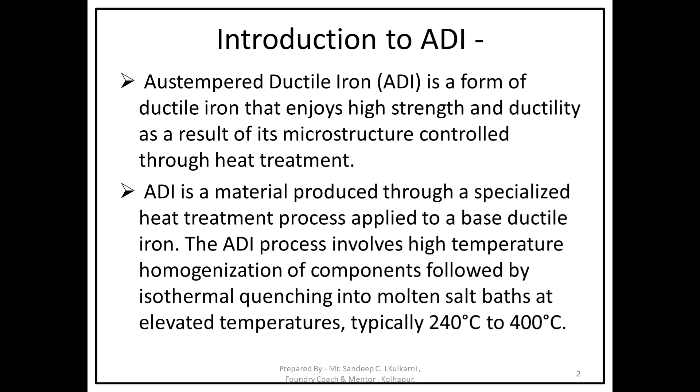Austempered ductile iron is a form of ductile iron that enjoys high strength and ductility as a result of its microstructure controlled heat treatment. Austempering is a specialized heat treatment process used to fortify metals, and it amplifies several of the desirable properties ductile iron castings already possess, including strength, abrasion resistance and toughness.

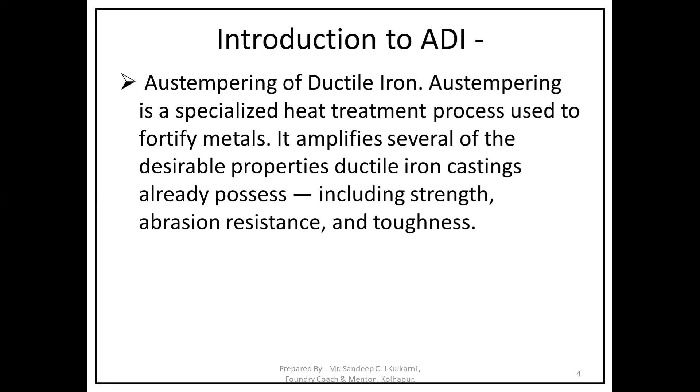Carrying out on the ductile iron, basic ductile iron metallurgy. Austempered ductile iron is a strong, light, and wear-resistant material. So, basically, what is the difference between a ductile iron and austempered ductile iron?

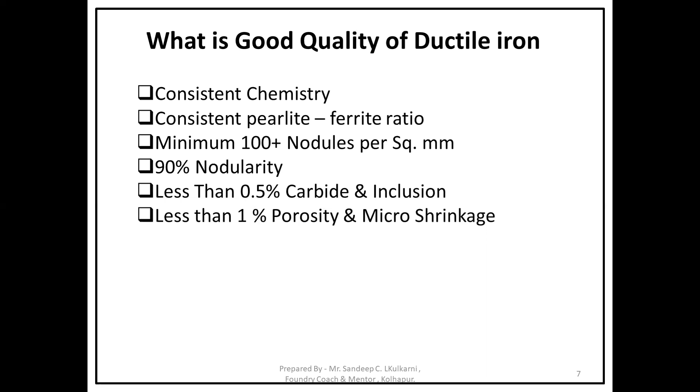There should not be porosity or micro shrinkages. The soundness of the casting should be good. That is also another requirement for making good quality austempered ductile iron. So you have to get good quality ductile iron first to get good quality austempered ductile iron. So this is the base chemistry that is tentatively expected. I have given it here.

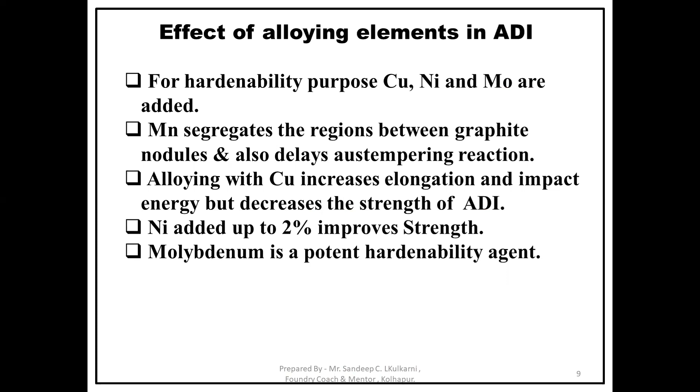Nickel is added up to 2% to improve the strength of the metal. Then moly is added as a potent hardenability agent as well. So these are the effects of alloying elements in ADI. Then we have some important grades which have been derived.

It's 850/10. That is, tensile is 800, elongation is 10%, and typical hardness should be 269 to 321 BHN. Then 1050/7: 1050 is the tensile strength, 7% is the elongation, and 302 to 363 is the typical hardness. 1200/4 is another grade: 1200 is the tensile, 4% is the elongation, 341 to 444 BHN is your hardness.

Then 1400/1: 1400 is the strength where 1% elongation is required, and 366 to 477 BHN is the hardness range. And another grade is 1600, typically showing a hardness of 444 to 555 BHN. So these are the typical popular grades in

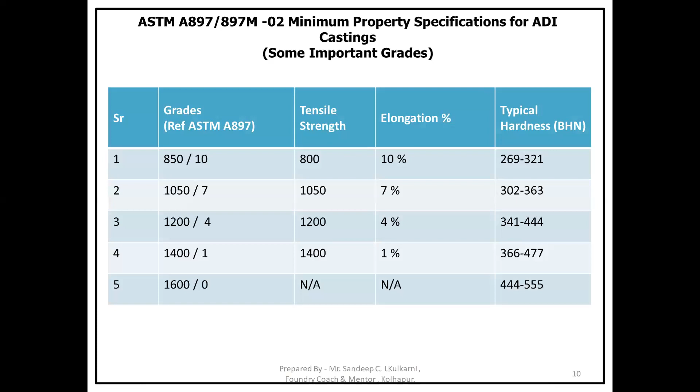austempered ductile iron. If you are going for 10% elongation, then you know that 400 or 450 should be the tensile strength. But here 10% elongation you are getting with 850 tensile strength. So your elongation remains the same while your tensile strength increases. So this is a very important factor: you are getting both tensile strength as well as elongation on the higher side in this austempered ductile iron because of the heat treatment we are carrying out on the ductile iron. So this is very important.

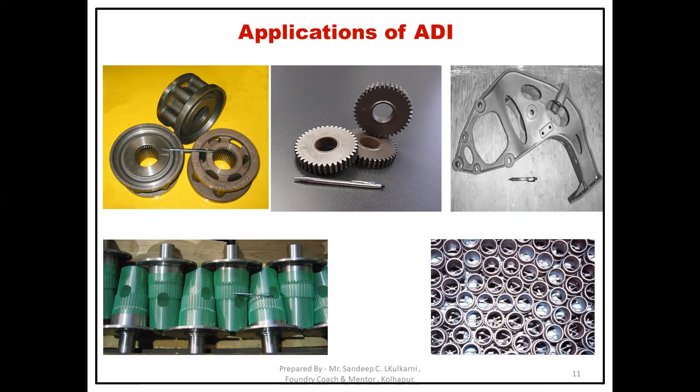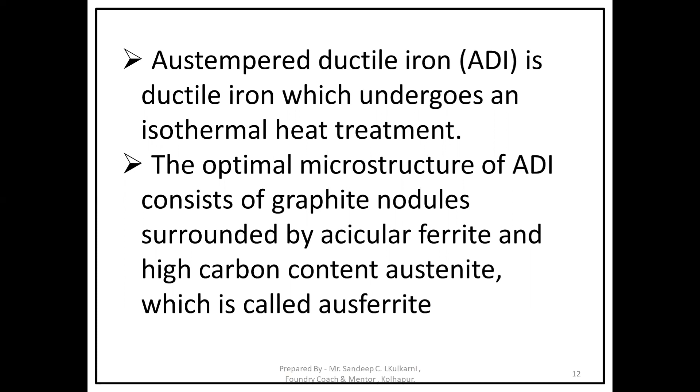So this is very basic information about ADI. I hope you understand it. It requires a good quality ductile iron with copper, nickel, and moly, and then you have to go for proper heat treatment. The heat treatment cycle, as I told you, is not very much defined by the suppliers or heat treatment vendors in the market. So it is a little bit of a suspense kind of thing, but there are people who can do this ADI heat treatment cycle as well.

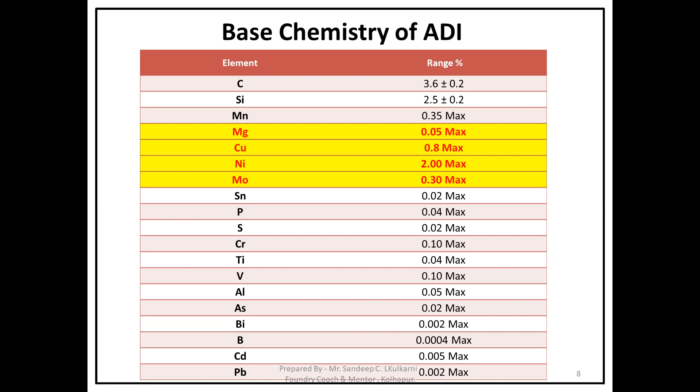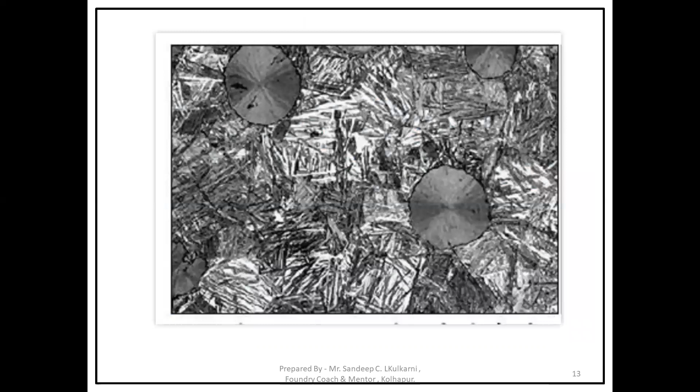So once you carry out this basic chemistry and a good quality of ductile iron, you can go for this heat treatment cycle to make the desired grade of ADI. So this is the basic information about ADI which I have shared with you for your ready reference, and I hope this will help you in better conversation with the customer while dealing with ADI products as well. So this is all about ADI.